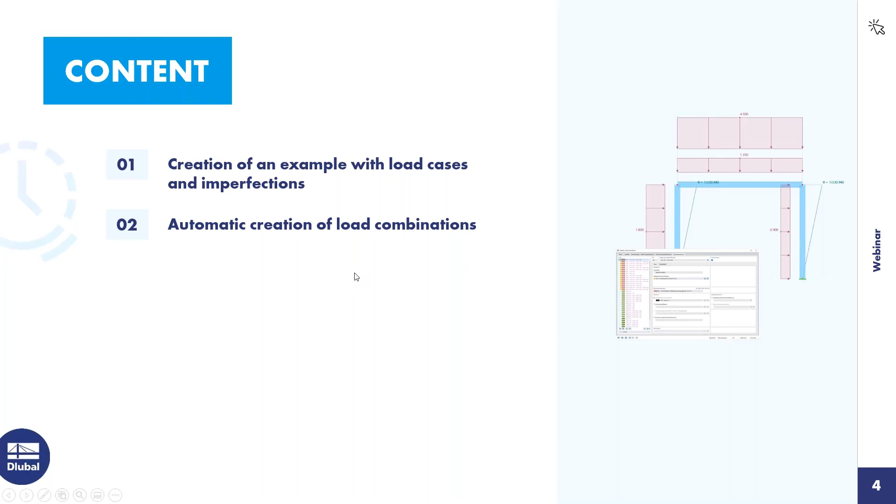You can email questions to info@dlubal.com. For today's agenda, I will create a simple example, a steel frame which you can see on the right side here, and add load cases and imperfections. Then follows the automatic creation of load combinations, which is the main part of the webinar. Then reduction of the number of load combinations and consideration of initial states.

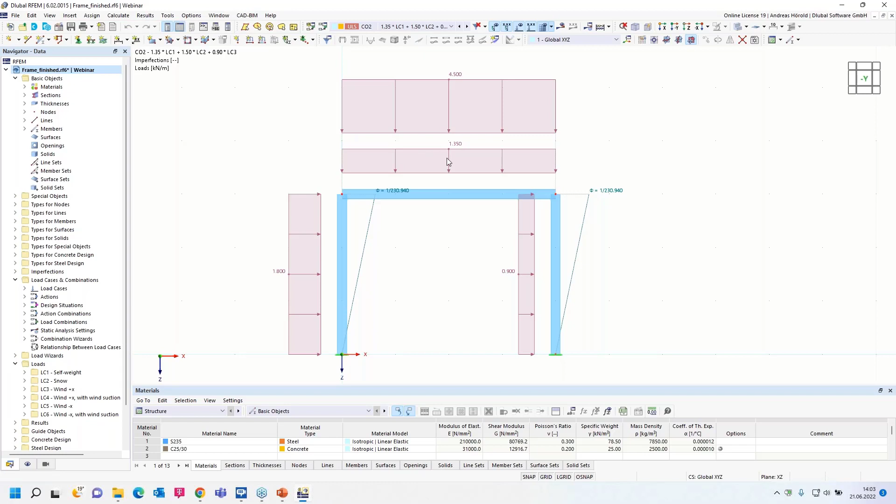Let's turn to the program. That's the finished model, but to show you all options in all dialogues, I will start with a new model. Here left above, file, new. I call it frame. 3D model is okay.

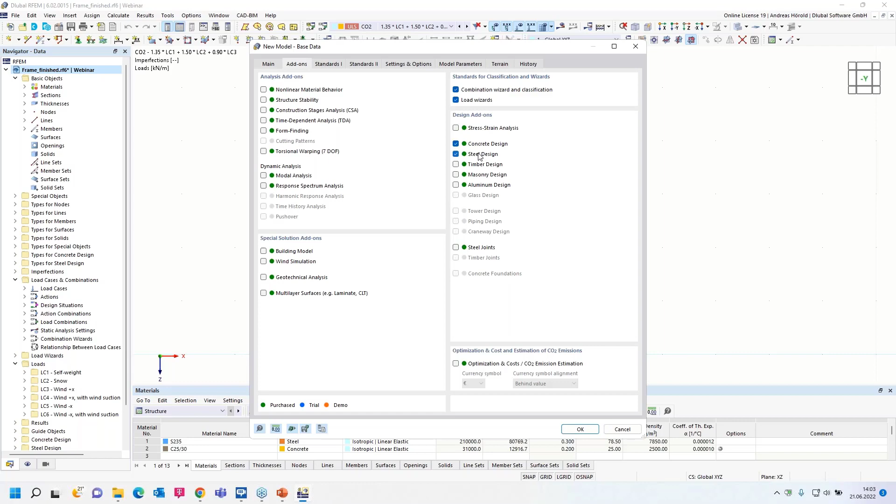Then it's important to check here combination wizard and classification, so that the load combinations are created automatically by the program. Load wizards for snow and wind - we don't use it for the steel frame, I can leave the check here. I activate two design add-ons to show you where you can assign the design add-ons in the load cases and combinations dialogue. Standards: there are a lot of standards implemented for the load case classification.

and the combination wizard. I use Eurocode 0, and we are here in Germany, so I use the German National Annex, but as you can see, almost all national annexes from the European countries are included. We don't use any load wizard, but you have also a lot of standards implemented here.

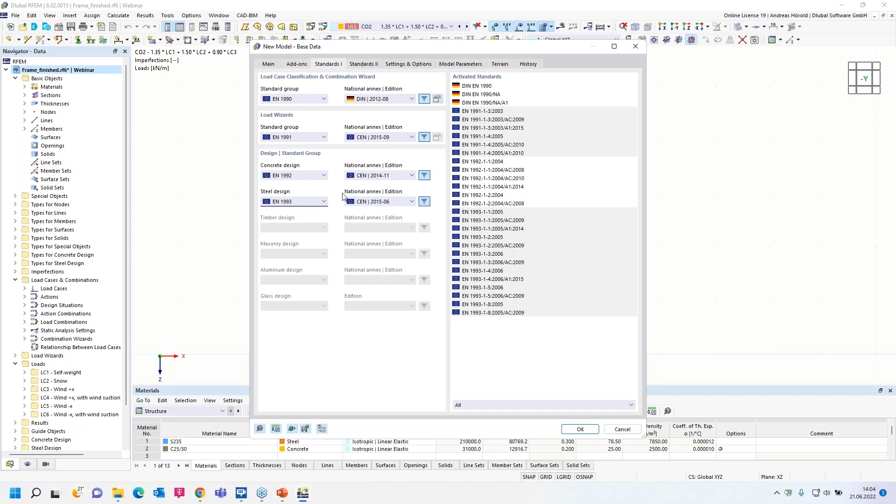Just a moment, I have to mute my colleague. Okay. Then the design standard groups for concrete and steel - but since we don't do a design, I can leave the standard setting.

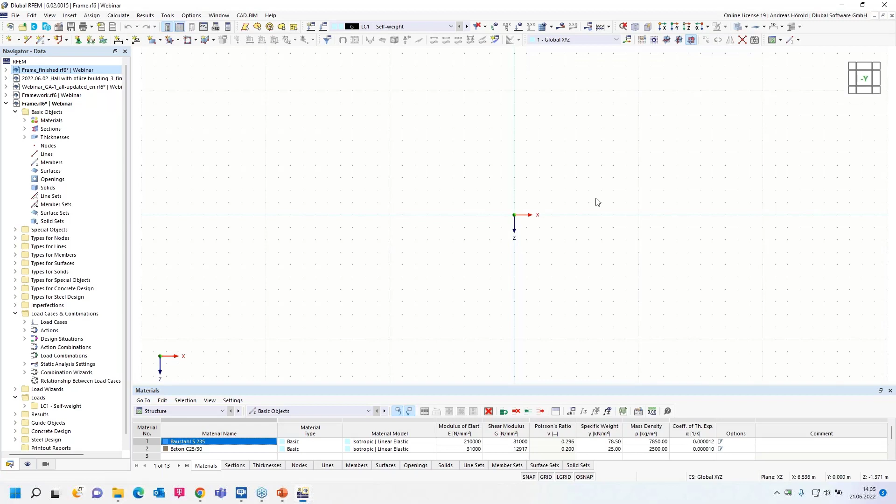Okay, then that's the new model. Here right above, I change the view in reverse Y direction and change the plane to XZ. So I zoom in a little bit and start with the first member here, left above, with a beam section.

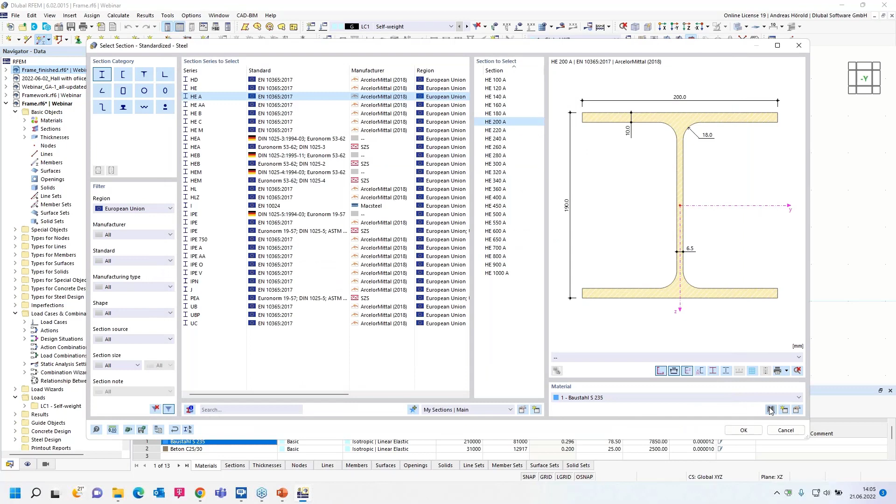I use a section from the database, I-beam standardized, HEA 200, and just a moment, I take a steel S235, okay.

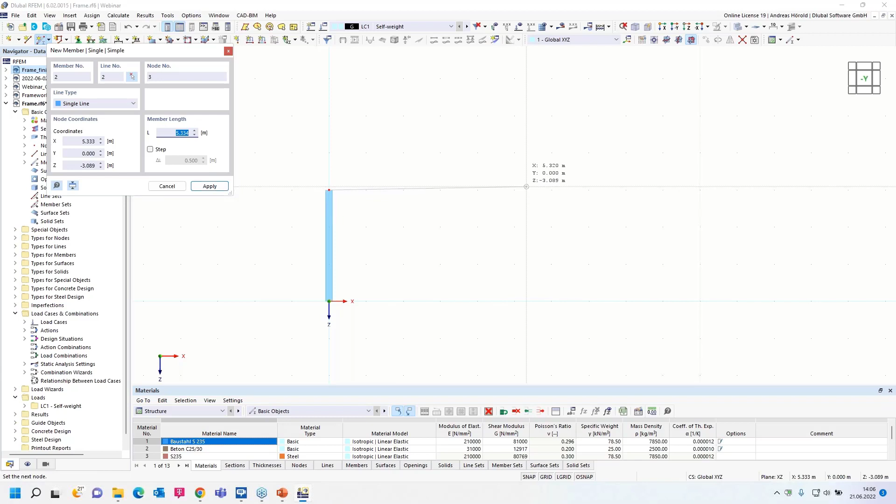and leave the dialog. The column should be 3 meters high. Then the horizontal beam, 4 meters in X direction.

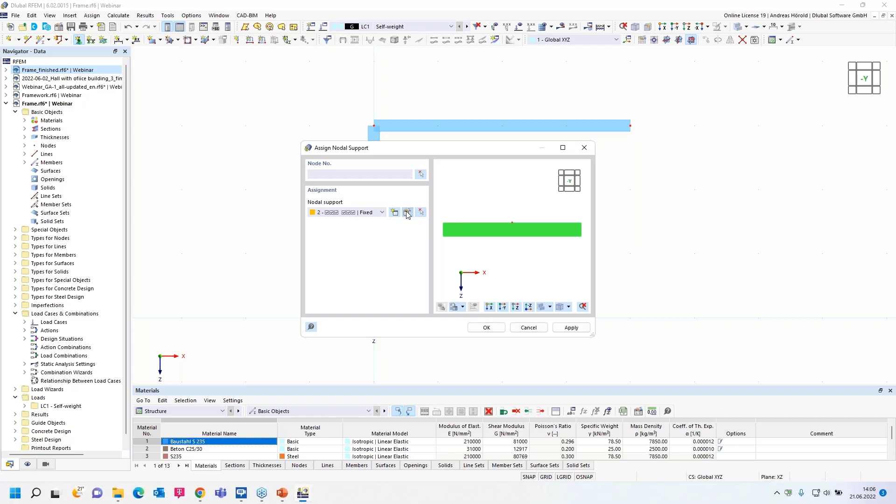Then I add a nodal support here left above, nodal support, and I use a fixed nodal support. We can take a look at the settings - fixed in all directions, and also the rotational directions are all fixed.

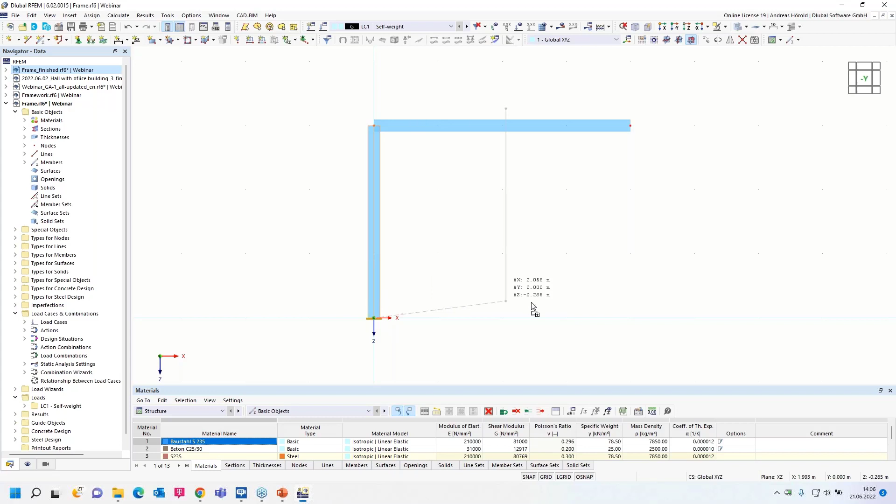I add it here, and then with pressing the Control key, I can copy that via drag and drop to the other side. Now the frame is finished. As you can see above, the self-weight load case is automatically created. We can add a member load for the self-weight load case, 1 kilonewton per meter.

Then I create a new load case with this button here, new load case, and I call it snow. I assign an action category according to Eurocode 0 - in this case, the snow and ice loads with a height under 1000 meters.

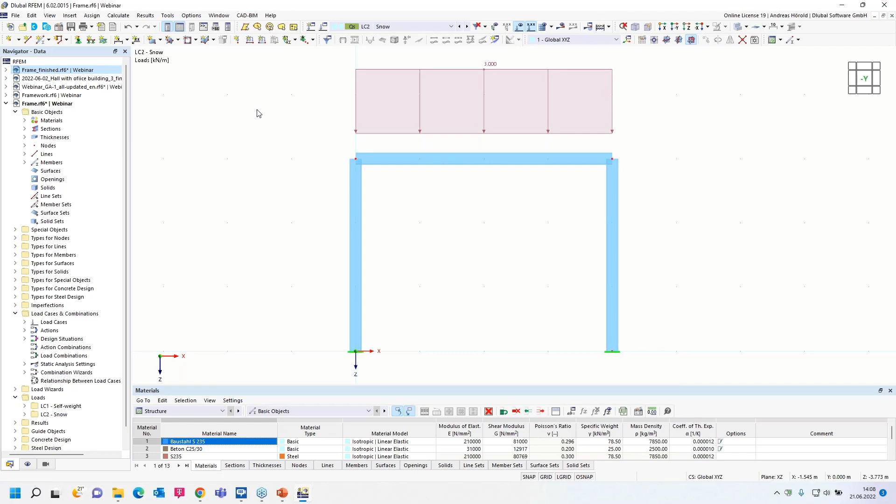So I add the next load, a uniform load, 3 kilonewton per meter. Then the next load case, wind plus X.

And I assign the action category wind. Member load again, this time in X direction, 2 kilonewton per meter.

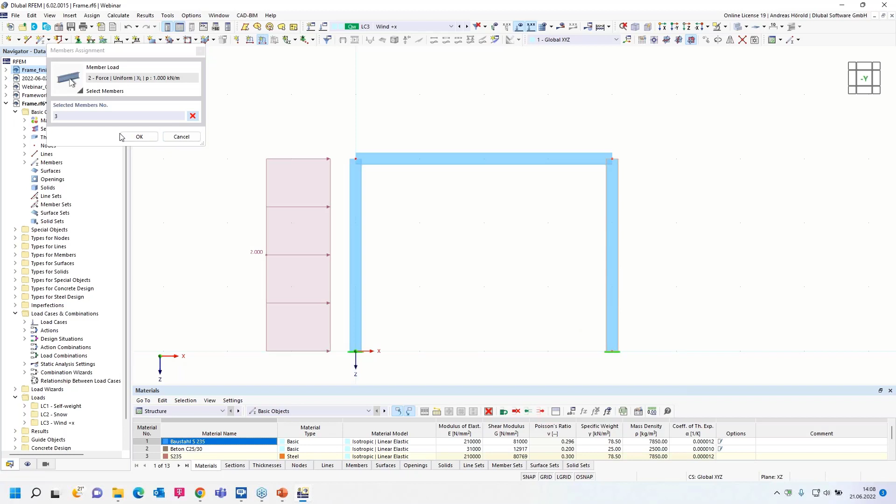I can reach the dialog with the enter key. Again in X direction, 1 kilonewton per meter. Load case 3 is finished.

And now I open the dialog load cases and combinations in the navigator data by right click. I will come back to that dialog later. So now there are different options - you can create, here left at the bottom, a new load case, then copy selected load case, and the other option is add loads to new or existing load case.

I use the option copy selected load case, so I rename it and call it wind suction.

Okay, all loads are copied. You can see that we are in load case 4. I add the load on the horizontal beam, minus 0.5 kilonewton per meter.

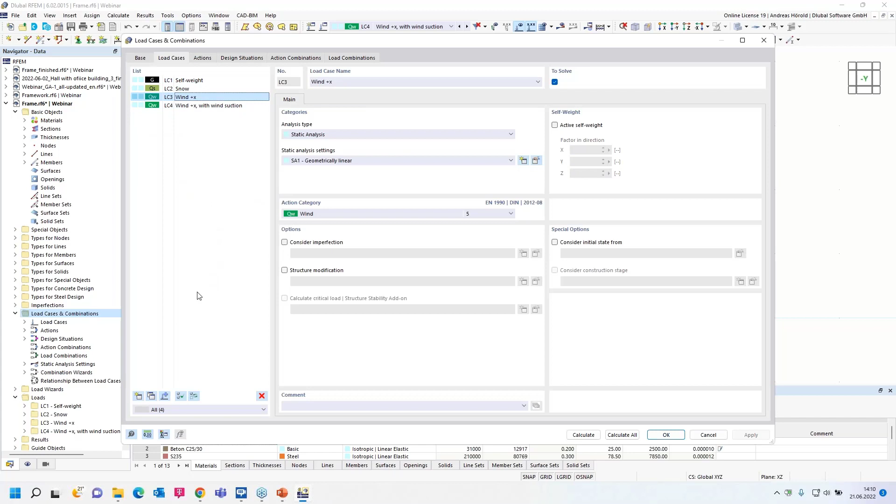This load case is finished. Then the same workflow: I copy wind load case 3 again and rename it to minus X. With double click, I come to the dialog edit member load and change it to -1 kilonewton per meter and this one to -2.

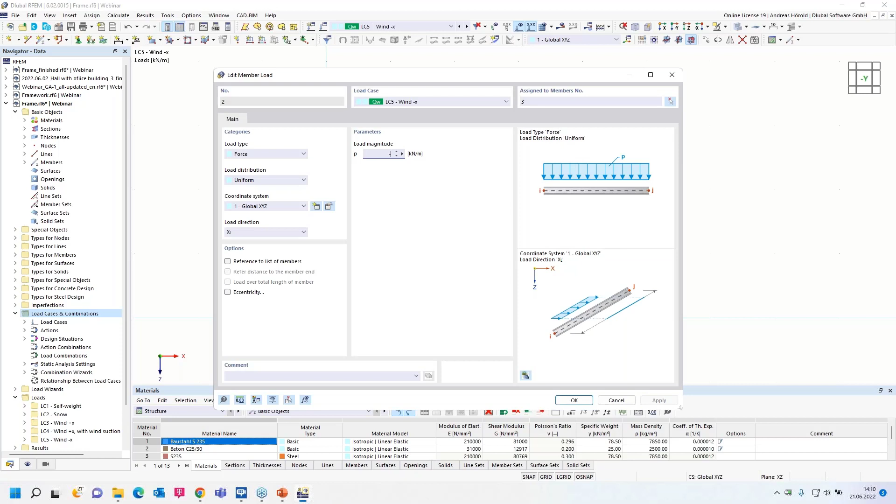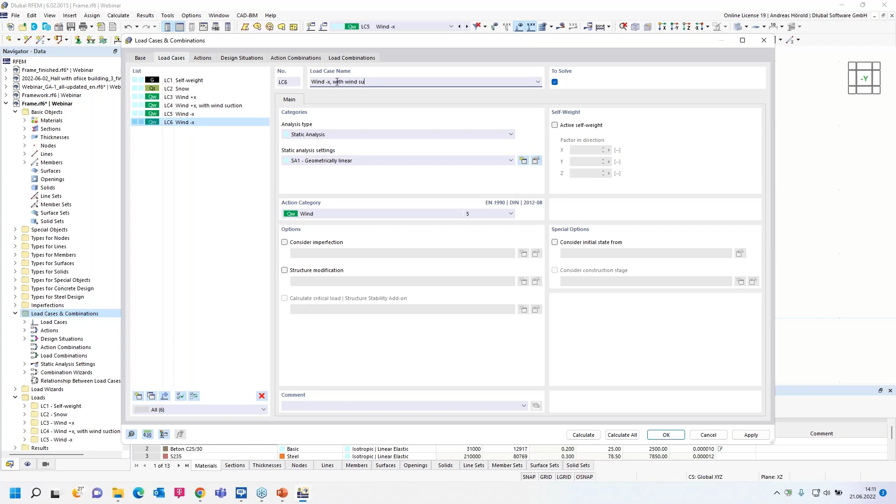Load case 5 is finished, and the same workflow for the last load case. I am at wind suction now, and add the load on the horizontal beam. So all loads are created.

New in RFEM 6 and RSTAB 9 is that you don't have to create imperfections as load cases. Instead, you have to create imperfection cases and then local imperfections. I will show you the workflow. I could reach the dialog by right-click in the navigator data, new imperfection case, or use the menu above: insert, imperfections, imperfection cases.

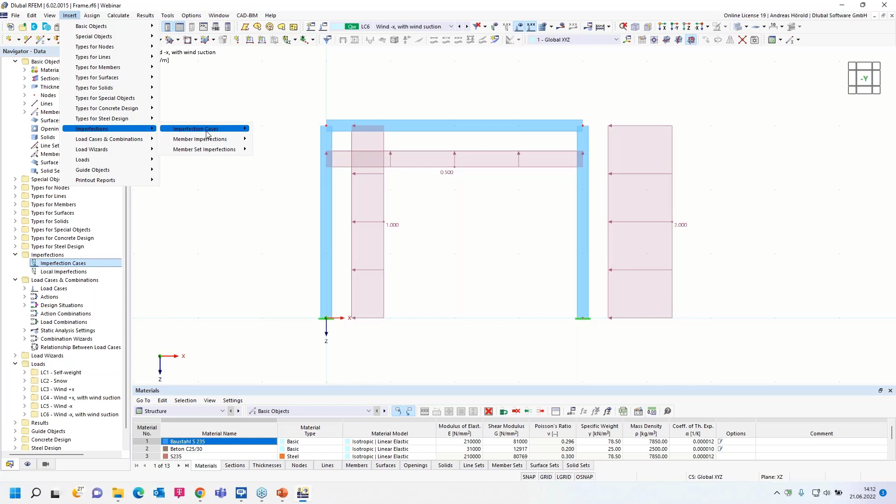So first imperfection case, imp plus x. In this dialog, I have to assign the right load cases that act together with the imperfection in plus x direction. That is load case 3 and load case 4.

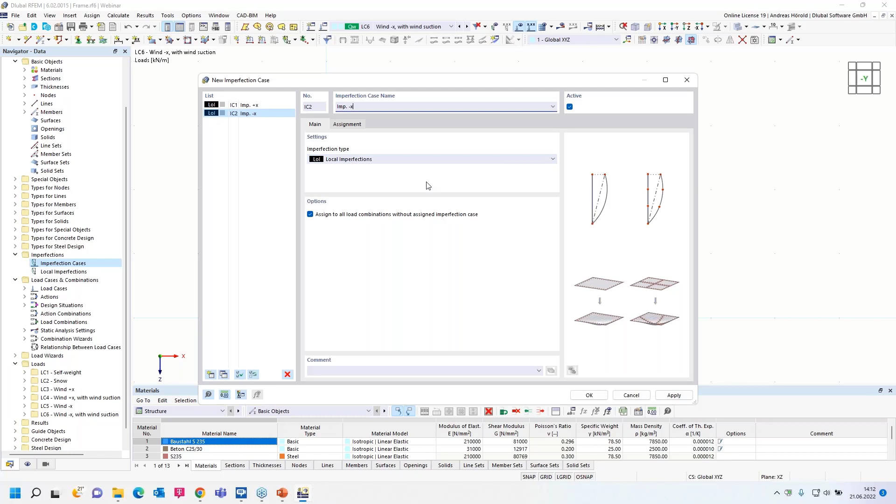Then, new at the bottom here, I create a new imperfection case, imp minus x, and assign load case 5 and load case 6 to this imperfection case.

I leave the dialog and then create a new member imperfection via right click, new member imperfection. I assign an initial sway on the columns according to Eurocode 2 and 3. Then I measure the height of the columns, 3 meters.

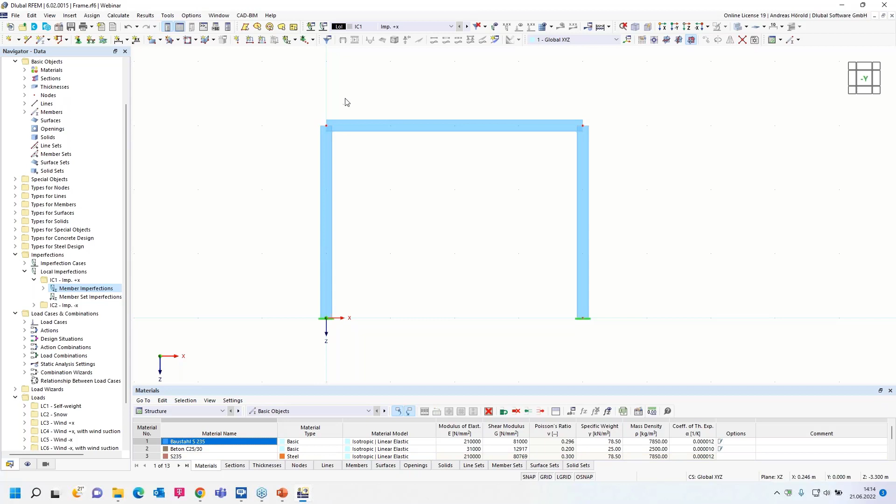Then 2 is the number of columns in one row. And that's all, and I have to assign the right imperfection case. So then I have to select the 2 columns, and here above I have to show the imperfections. So the first imperfection is created.

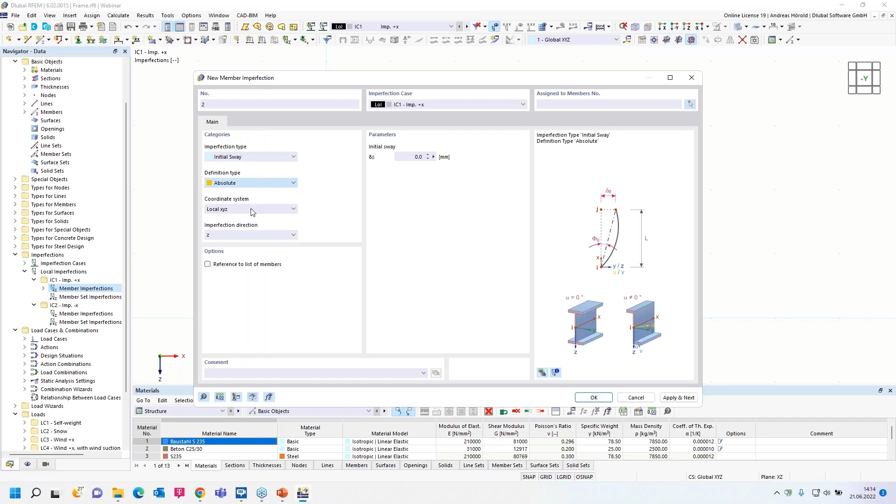Then I can create the imperfection for imperfection case 2. I can do that in the navigator data again, but I will use the option over insert, imperfections, member imperfections dialog box. Initial sway again, the same definition type in -x direction, 3 meters, and 2 columns in one row.

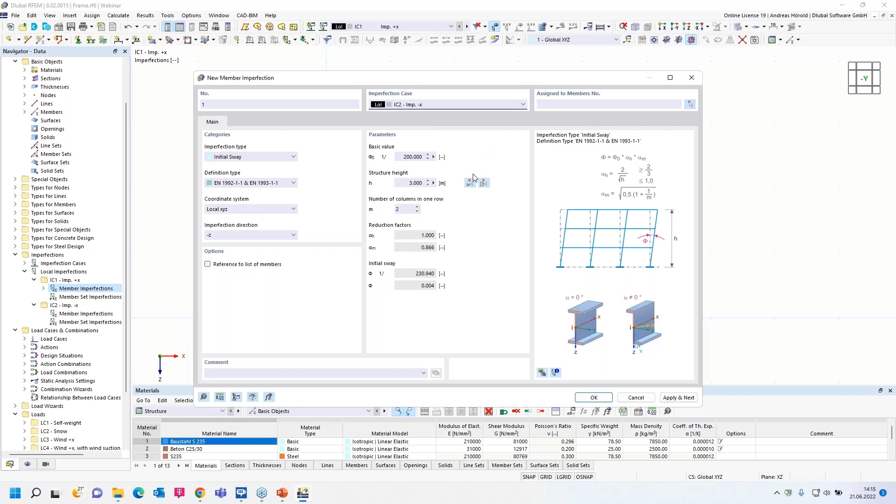Then I have to assign it to imperfection case 2, imp -x. I select the 2 columns again. So this is imperfection case 1 and 2. That's all for the imperfections.

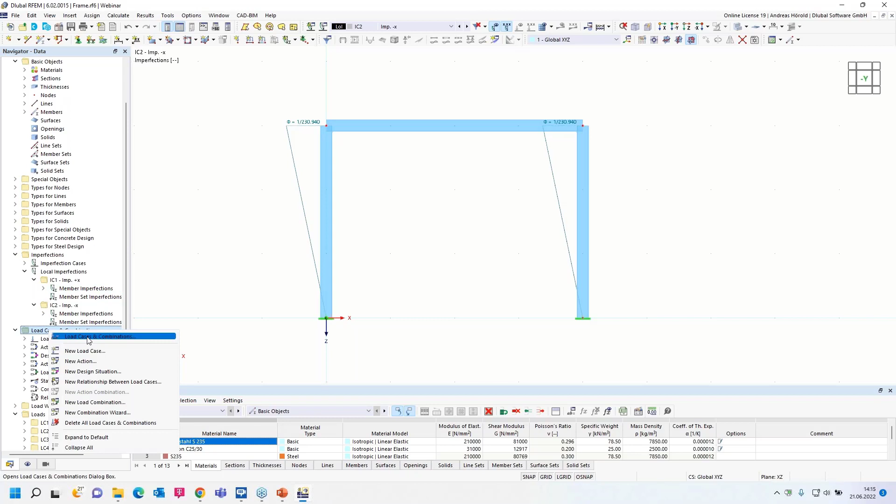Now all is completed, meaning the imperfections and the load cases. I go back to the dialog, load cases and combinations, and start with the base dialog. At the beginning, we selected the standard Eurocode 0 and the German national annex, and already set this check to use the combination wizard to create combinations automatically according to this standard.

For result combinations, I have to say that in RFEM 6 and RSTAB 9 the most unfavorable constellations of load combinations are determined in the design situations. You can see that here; we'll come to this dialog later. You don't need to create any result combinations for designs in the add-ons, as I mentioned, we will do that in the design situations.

Generally, load combinations are created for the structure analysis to determine nonlinear effects correctly. Result combinations, however, superimpose the results of load cases or combinations. This is maybe necessary, for example, for dynamic analysis. I will show that in the last example.

Then we will use the result combinations and the sub-results. Then parentheses: for example, if you would do a criterion nesting, you could set combination 1 or combination 2 in brackets. That would be possible. And sub-results make it possible to specify additional combinations that can be used for the design.

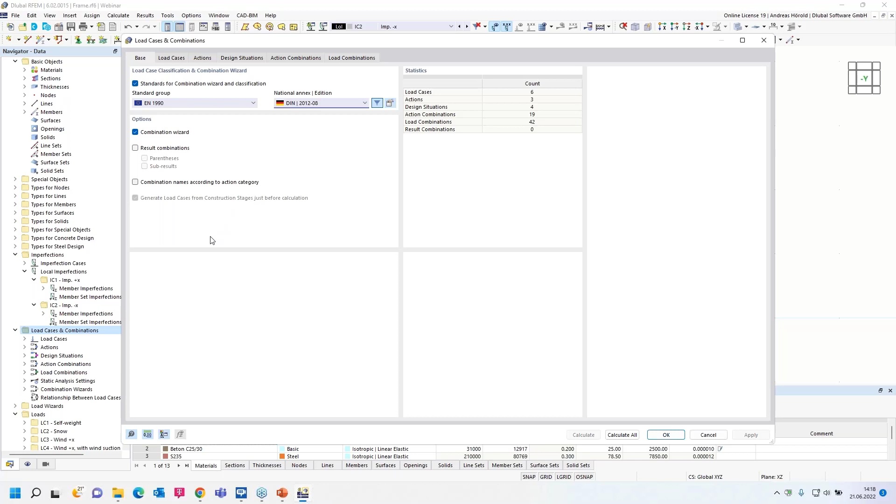Then, generate load cases from construction stages just before calculation - we don't activate the construction stages design. If you want to see a webinar about this add-on, you can find it on our website. At the end of my presentation, I will turn to the website and show you how to find webinars, also previous webinars. We presented webinars on almost all new add-ons, also all add-ons of RFEM 6 and RSTAB 9.

So then load cases - we were already in this dialog. Maybe some additional information for the self-weight load case: the structure self-weight is activated by default. You can see that here on the right side.

The default setting is geometrical linear, but you also have the option to use second order or large deformations analysis.

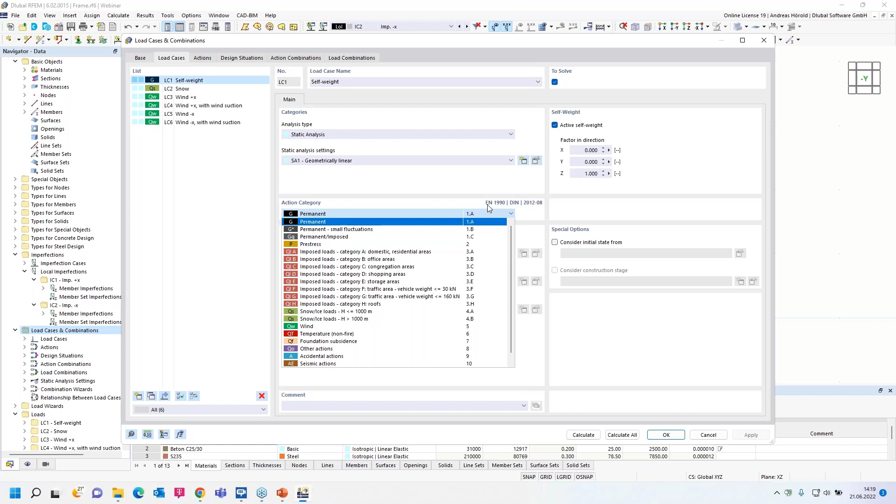Then the action category, you already saw that. According to the standard, it controls the superposition of load cases and the partial safety and combination factors, according to the selected standard, in our case Eurocode 0. Then the wind load cases.

Imperfections are considered, you can see that here. Load case 3, wind in the X direction, acts together with the imperfection in plus direction.

Structure modification, consider initial states from. I will come back to these options later.

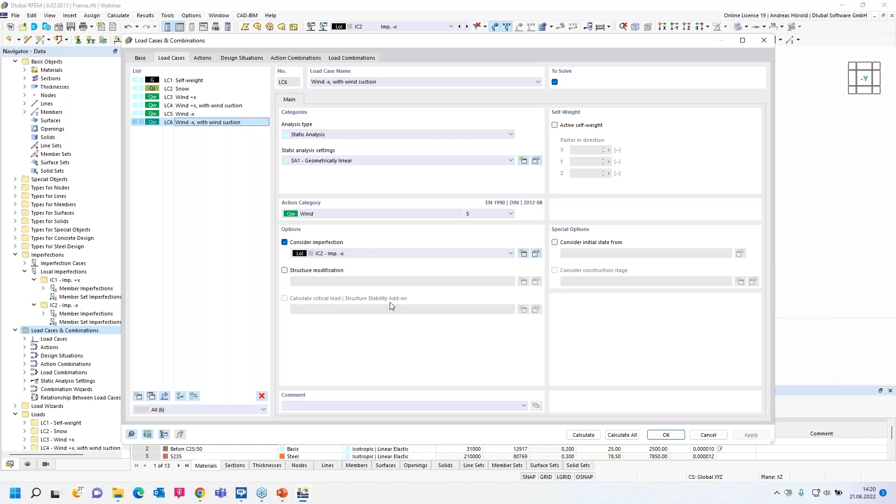Grayed out are also the add-on structural stability and construction stage add-ons. As I already mentioned, I will show you at the end how you can find webinars about these add-ons if you are interested.

So then actions: permanent, snow loads, and wind loads. Different action types are available. For example, simultaneously, all load cases of the action can be combined as desired.

Alternatively, that's assigned to the wind load cases, meaning only one of the actions of the load cases can be effective in the combination.

Then we have already the option differently. Load cases can be assigned to groups. I can show that, for example, I add here 1, 1, and 2, 2, meaning 2 groups.

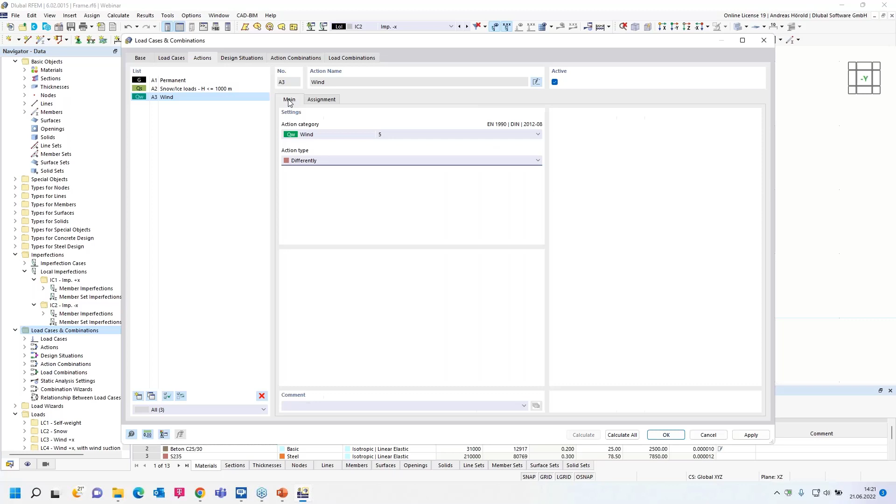Load cases act alternatively within one group, and load cases in different groups can occur simultaneously. So I change it back to alternatively for the wind load cases.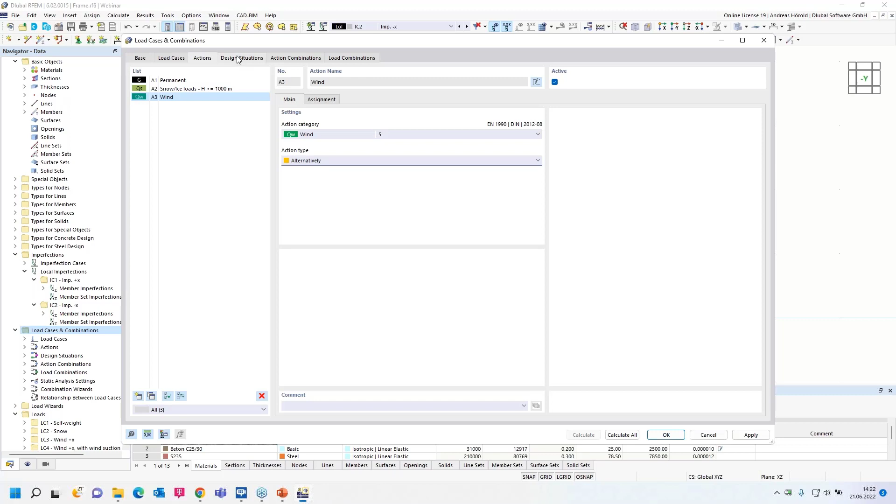That's all for this dialog. Design situations: 1 for ultimate limit state design, and 3 for the serviceability limit state design, are created.

They are assigned to the add-ons, concrete design, steel design. Then combination wizard, I open the options here.

Load combinations are preset since nonlinear effects and results according to second order analysis are only correctly determined by load combinations.

Then the static analysis settings here for second order analysis. I can go to the dialog here, the sub-dialog.

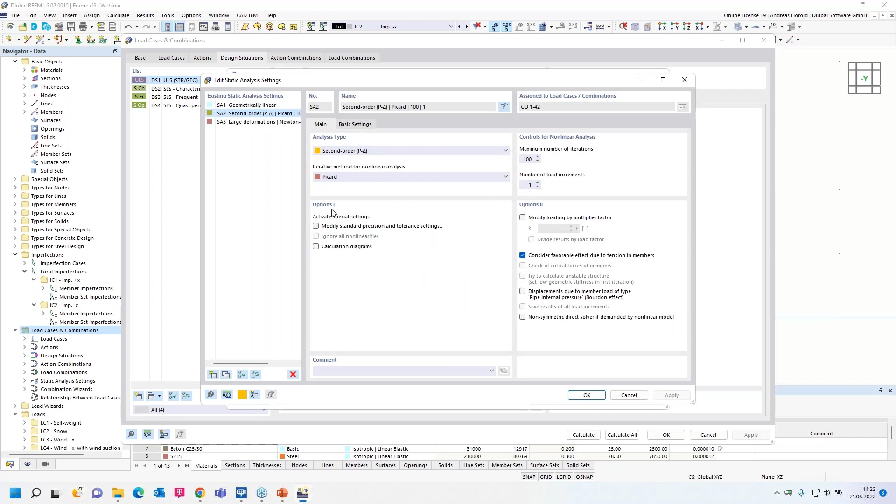You can, for example, use another iterative method. You can change the number or the maximum number of iterations. If you have a problem that calculation doesn't converge, you can also set the number of load increments higher. So that should be all for this dialog.

Then options 2, user-defined action combinations. No action combination is created when you check this, but actions must be combined manually.

Then favorable permanent actions: additional load combinations are created, for example the combination for design of lifting.

So then, reduce number of generated combinations. That's a quite powerful tool with a workflow. I can explain it with a simplified workflow.

All load cases are calculated individually based on the calculated values of internal forces and moments, deformations and reactions. You get two groups of load cases for each location.

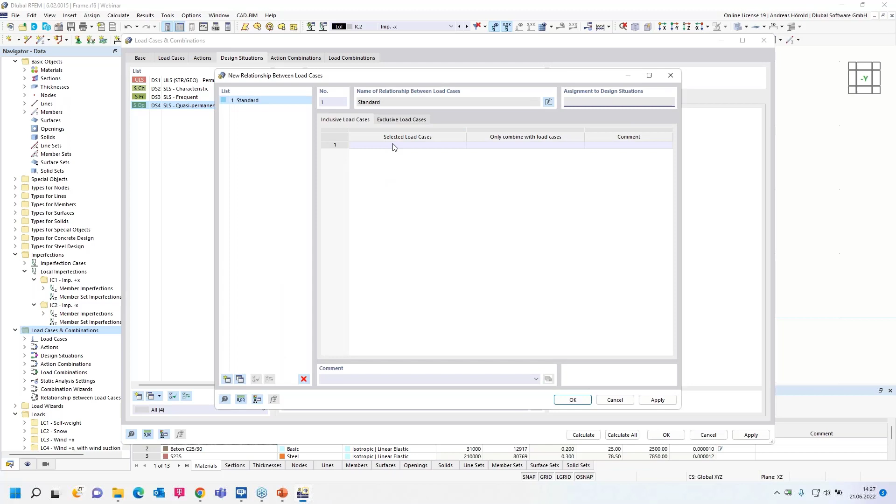Consider inclusive, exclusive load cases. So you can select one load case or more load cases and define that it or them only are combined with certain load cases.

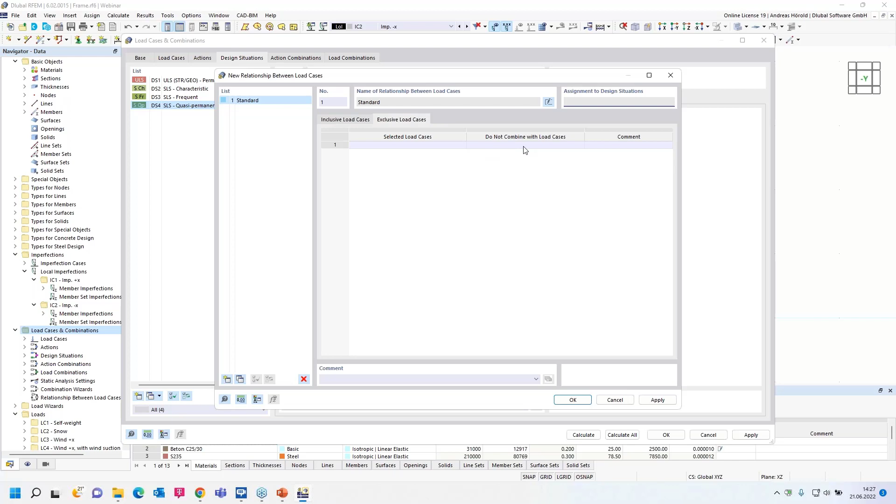Or you can exclude load cases, so you select load cases and they don't have to combine with selected load cases. I don't use that option here.

So then action combinations, as the name suggests, actions are combined now. For example, from action combination 3, we will get 4 load combinations, since there are 4 wind load cases in action 3.

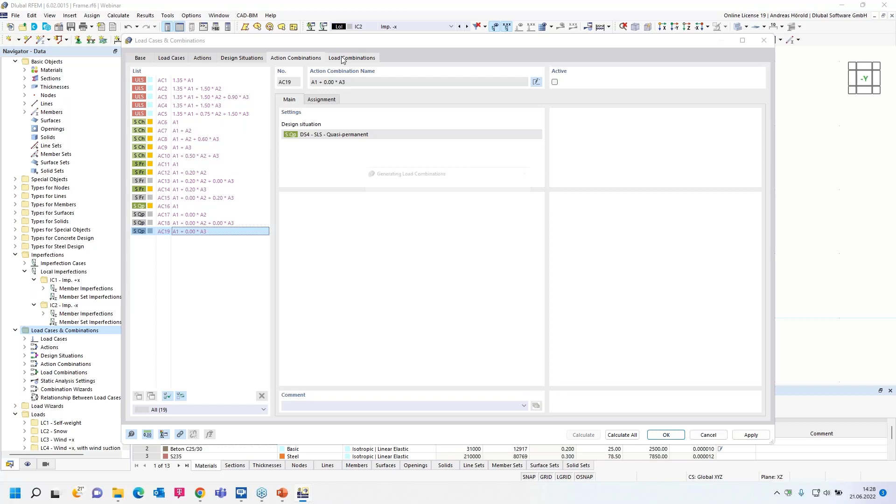Action combinations that are not relevant are set inactive by default. You can see 5 action combinations are inactive. That means we have 19 action combinations minus 5, which equals 14 action combinations, and we will get 37 combinations: 16 for the ultimate limit state design and the rest for the serviceability limit state design.

Here left above, with that button, it's possible to create or add combinations manually. Let's take a look again at the design situations. We can click here on overview, the assigned load combinations: characteristic, frequent, quasi-permanent. So let's try to reduce the number of generated combinations.

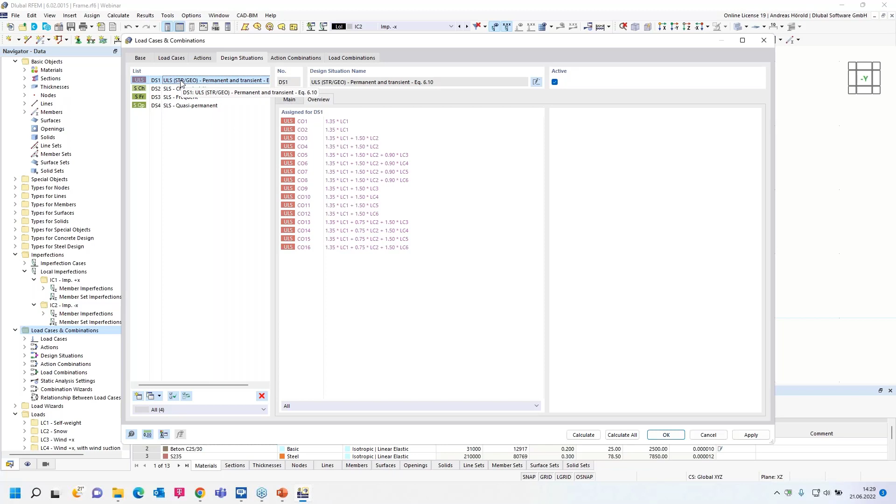We've got 16 load combinations for the ultimate limit state design. I go into the combination wizard and set the check here, then go to the load combinations. As I said, 6 load cases are calculated at the moment.

And we have got 16 load combinations, no reducing. That can be, just try it. Sometimes it doesn't reduce the number of combinations, because all the load combinations are important for the calculation. I will try that on another practical example later.

So then I would like to show you the structure modification on this example. Let's calculate combination number 9. That contains only the self-weight and the snow load.

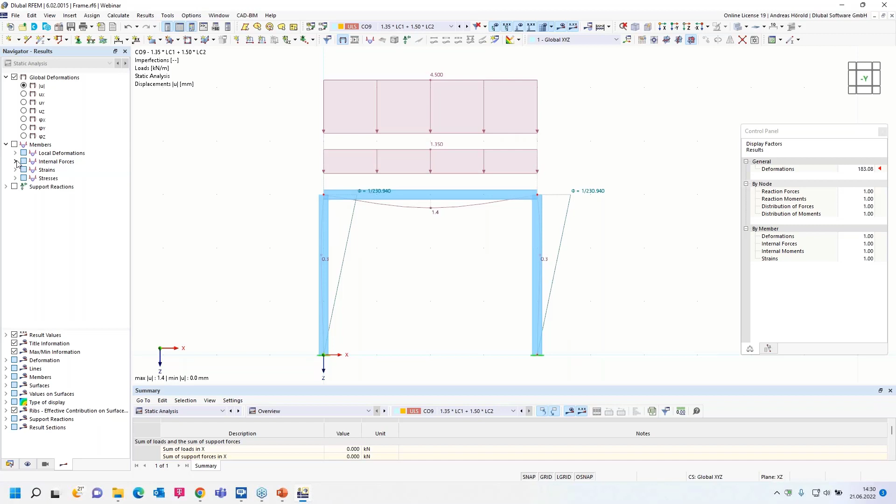I displayed the internal forces, the My. As you can see, the moment curve is quite symmetrical, almost symmetrical because of the imperfection. And I would like to reduce the stiffness of this column in that load combination.

How to do that? I go back in the load cases and combinations dialog, go to load combination 9, and check here structure modification. We have to create a structure modification. There are different options: you can modify the stiffnesses of materials, sections, members, nodal supports.

You can deactivate objects, members, surfaces, supports, and so on. I would like to reduce the stiffness of a member, so I have to create the member modification here.

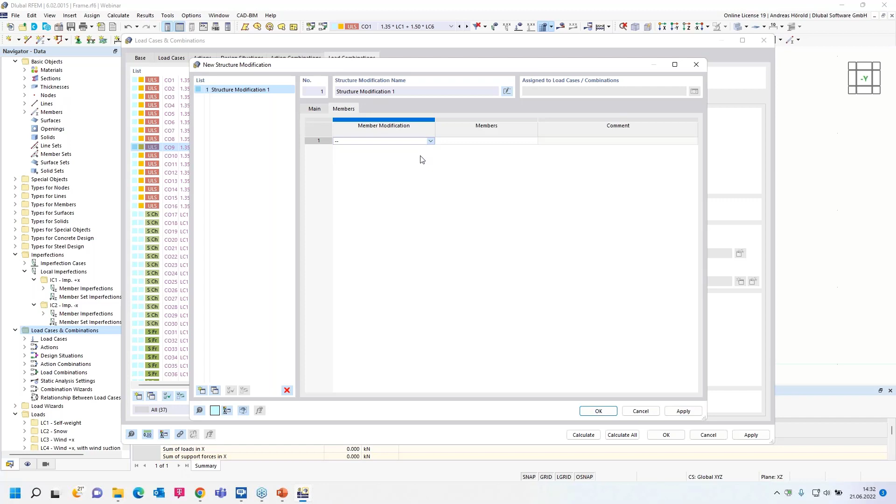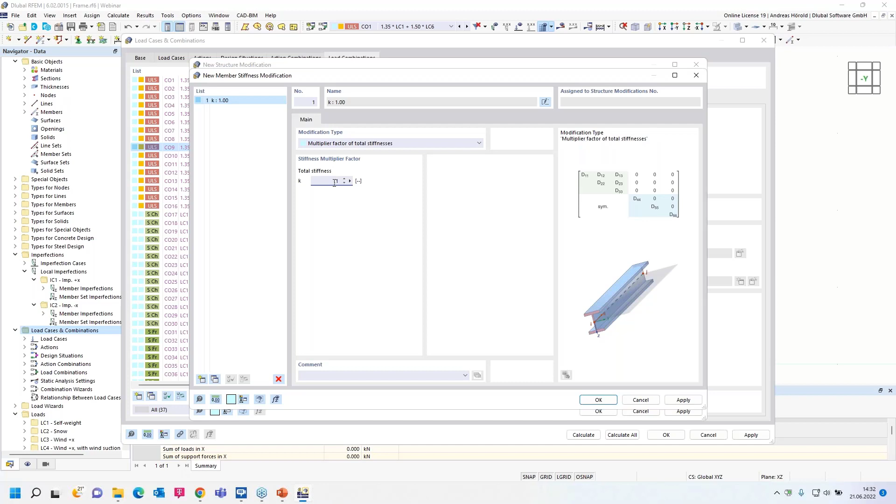New member stiffness modification. I use the modification type multiplier factor of total stiffnesses. You can see here that you have different options for the American standard, Canadian standard, and so on. I enter 0.1, meaning the stiffness or total stiffness is only 10% after the modification. I have to select the member, the right column.

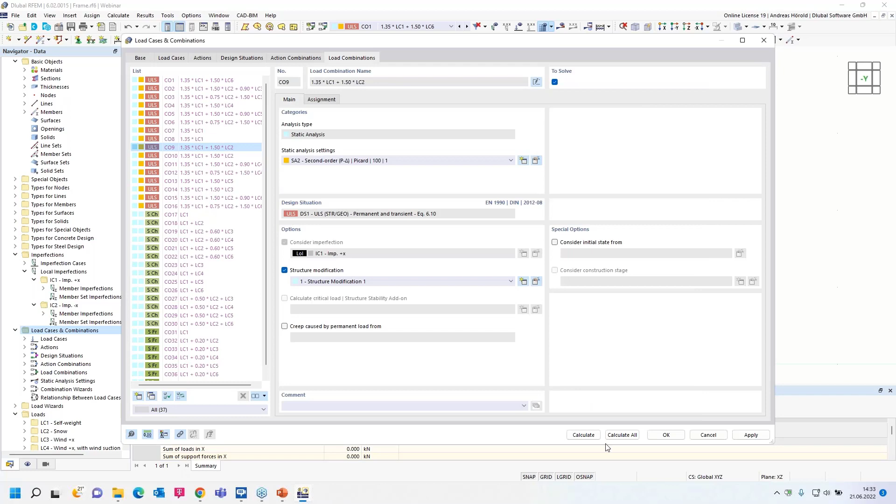Okay, and can calculate the combination. As you can see, the moment curve isn't symmetrical anymore, because this column has only 10% of the stiffness. Okay, that's all for this example. I switch to the next example.

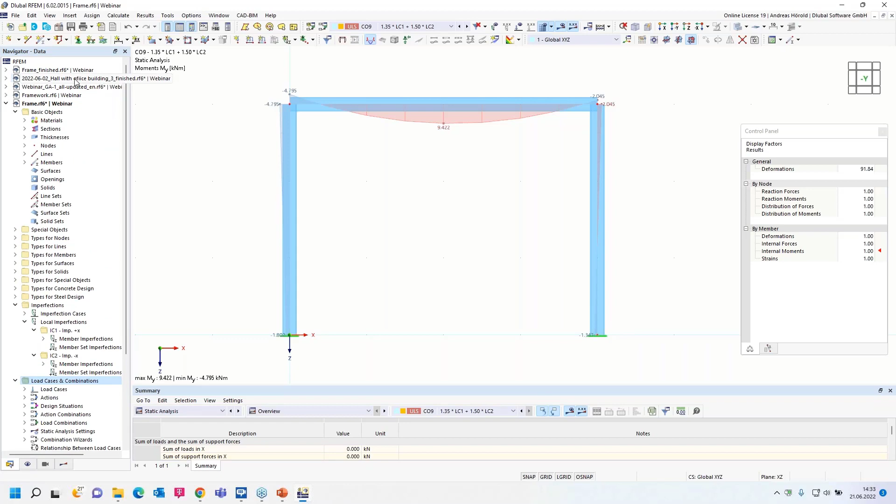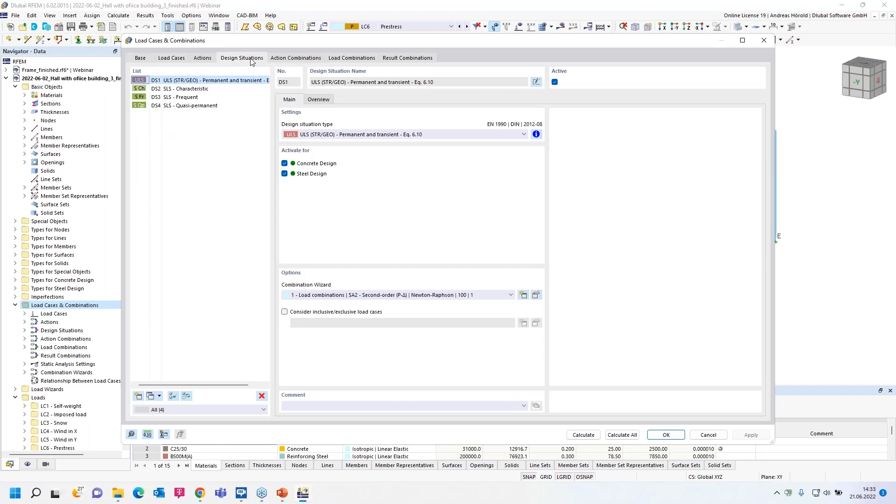Now that's a quite practical example. I think I created that and used it for the webinar 3 weeks ago. Let's try the reduction of the combinations for the ultimate limit state design. Let's take a look at the load combinations. We've got 26 load combinations for the ultimate limit state design.

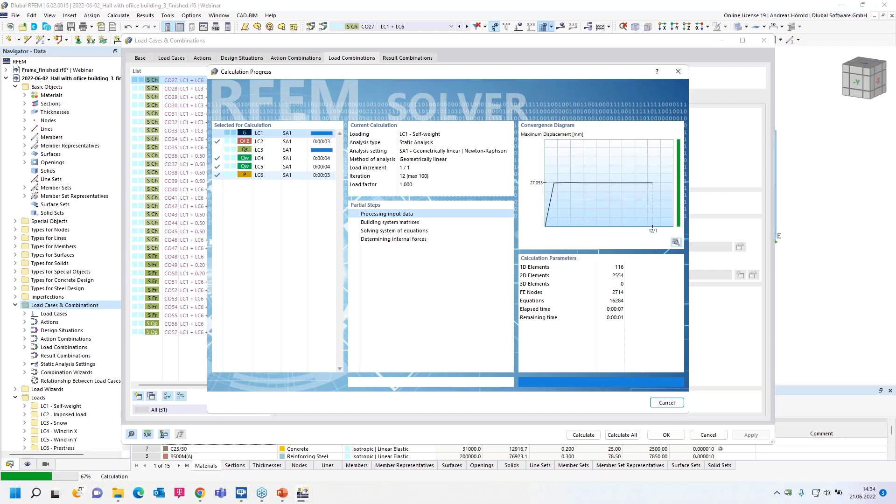For this design situation, I go into the combination wizard and check the reduce number of generated combinations option. So then the same workflow: the 6 load cases are calculated, then the combinations will be created. We had 26, and after the reduction, we have got 10 combinations.

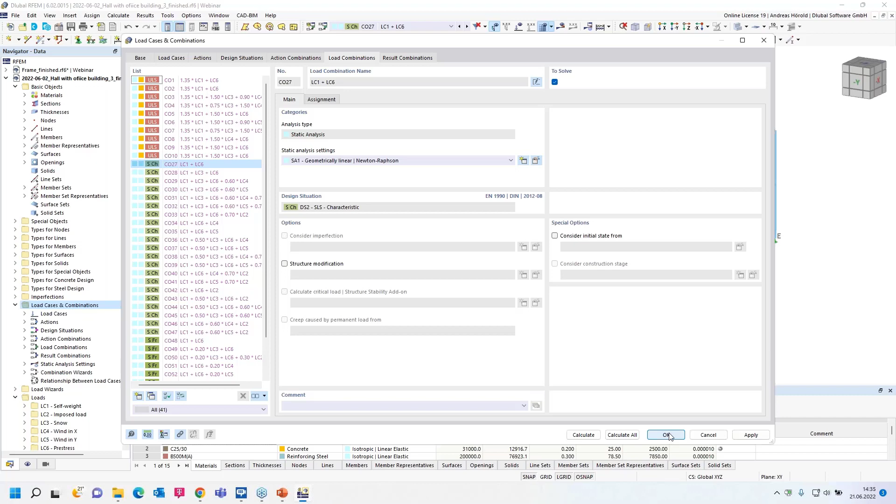As you could see, sometimes you can reduce the combinations, sometimes not. That depends on your models, on your number of load cases and number of load combinations, etc. Okay, then I can leave the dialog and turn to the next model.

This is also a model from a webinar, the geotechnical analysis. You can see the model here, with a nonlinear solid model with different stiffnesses in various load situations. And we would like to consider the soil's initial stiffness that is loaded by the self-weight.

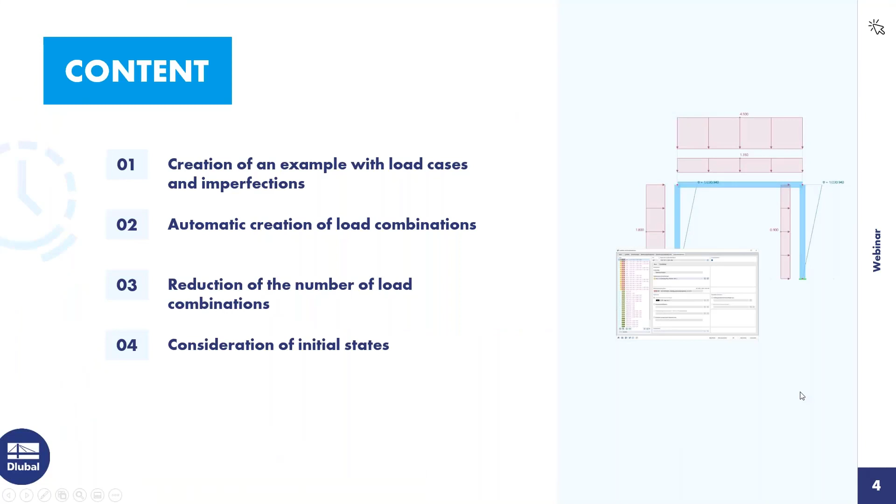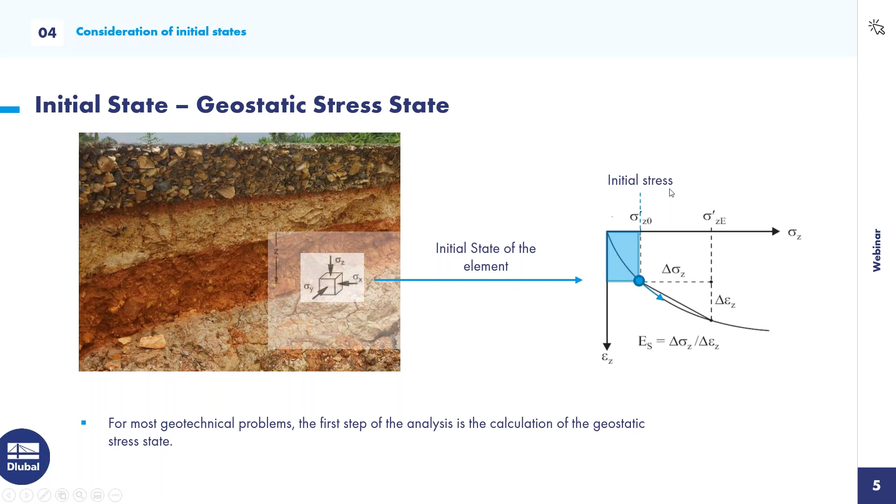Okay, let's go back to the program. We go to the load combinations dialog. So we have different load cases: self-weight of the superstructure, dead load, live load, snow, and the self-weight of the soil. The self-weight for soil solids is activated. This is this action category.

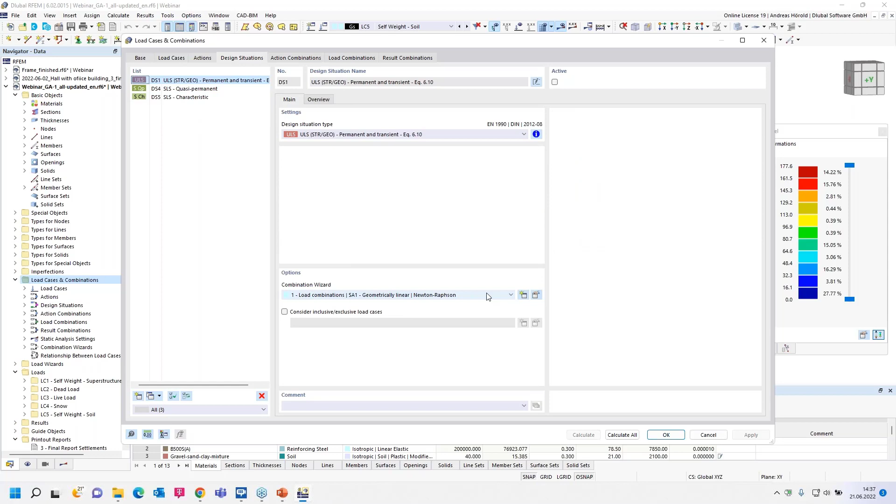It's not necessary to calculate these load cases, only later in the load combinations. So then I showed the combination wizard, and it's checked to consider initial state from load case 5, self-weight of the soil.

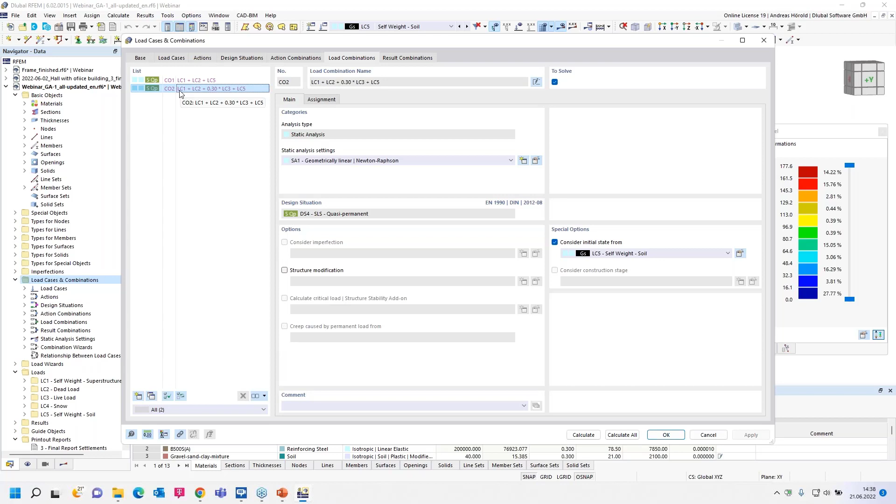Then we get 2 load combinations, and load combination 2 is decisive. So we created result combinations, one result combination. Load combination 2 minus load case 5 means we subtract load case 5 from combination 2. That won't be necessary in the future, we're working on it, but at the moment we solve that by creating a result combination.

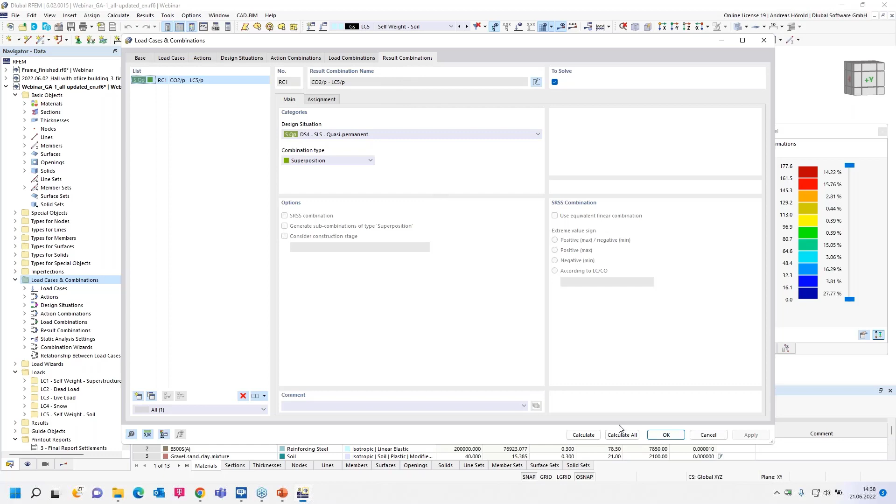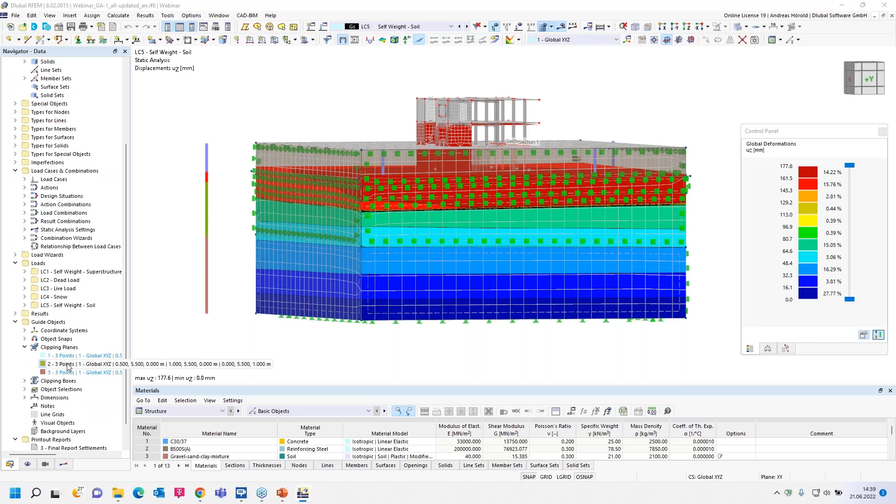Let's take a look at the program, at the graphic. Load case 5, we get global deformation of 177 millimeters. Let's take a look at the clipping plane. I left both, there are clipping planes. I activate this one so I can rotate it.

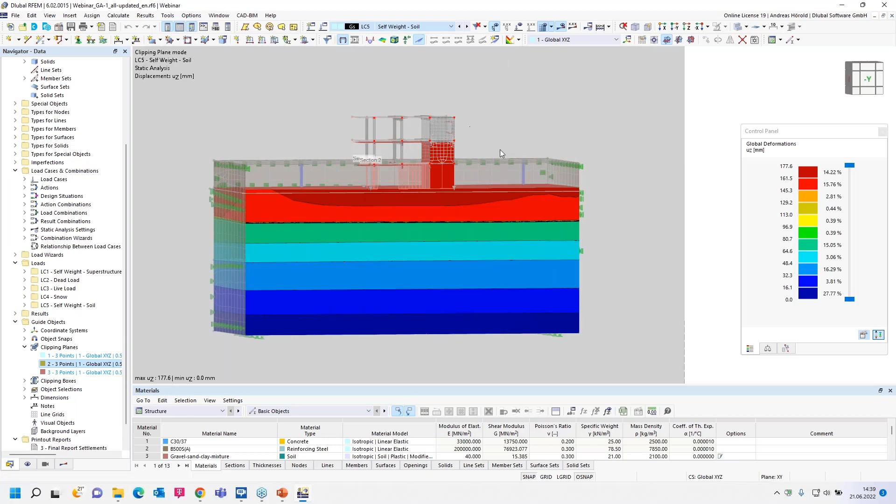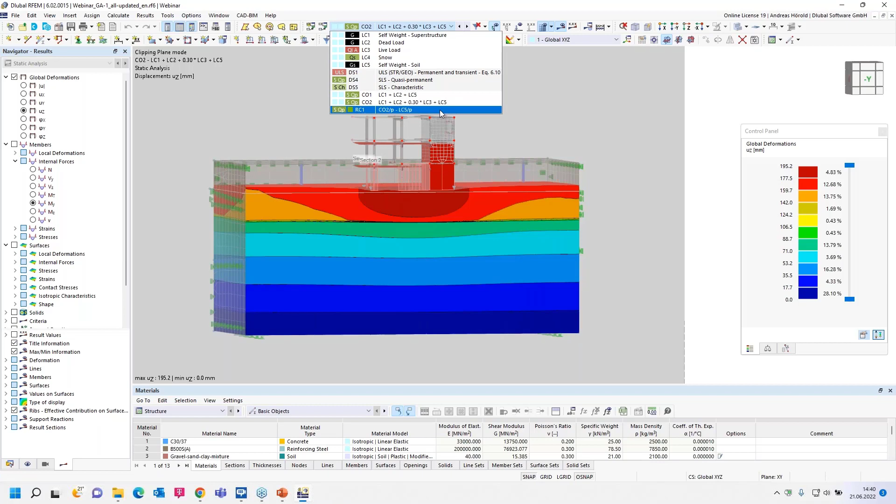As you can see, the building here has no influence for the self-weight of the soil load case, but then in combination 2, the deformation of the self-weight and the deformation caused by the building is added, and you can see a global deformation of 195 millimeters. Then we subtract the self-weight load case, and now you can see the right deformation under the building, 30 millimeters.

Okay, that should be all for the initial state. I turn to the last example for today.

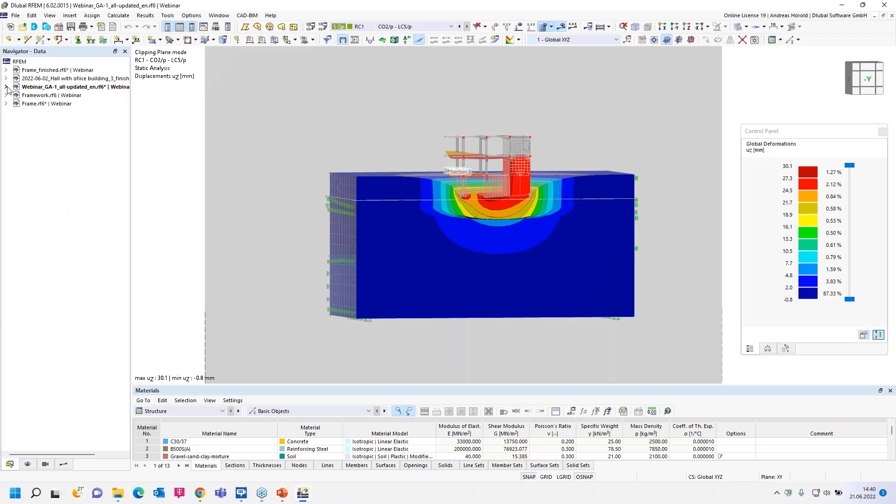I would like to show you a model with result combinations. I open the dialog here. As you can see, the result combinations are activated, and also the sub-results. Standard for the combination wizard and classification is Eurocode 0 again, and the German national annex.

Let's turn to the load cases. Load case 6 for modal analysis, and load case 7 contains the results from modal analysis for spectral analysis. Then the actions: action 4, seismic action, and load case 7 for the spectral analysis is assigned.

Then design situations. Design situation 1 for determination of mass combinations for modal analysis, and design situation 2 for accidental design situation for seismic load in the ultimate limit state. When you select, for example, activate the steel design or concrete design, then you need to activate them here for the ultimate limit state design.

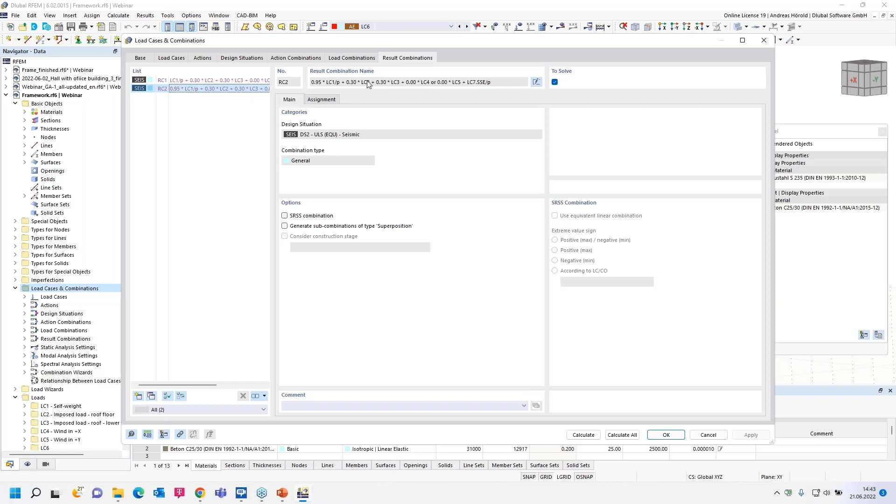A new feature in RFEM 6 is that the result combinations are automatically created, you can see that. And at assignment, you can see the selected or assigned load cases. I activated sub-results, and you have the possibility to superimpose other partial results here as well. Okay, that was the example for the result combinations.

That's all for today's webinar.